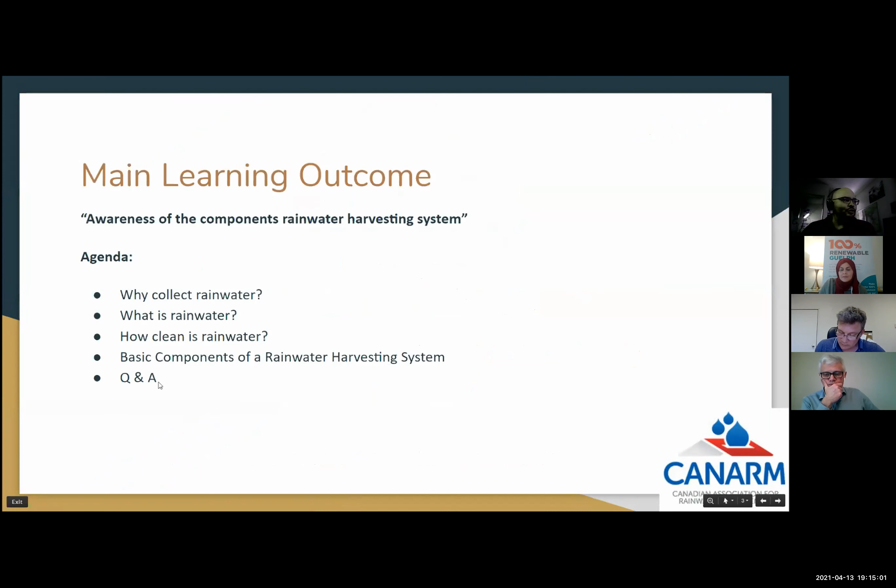So the main learning outcomes that I'm going to talk about right now are why collect rainwater, what is rainwater, how clean is rainwater, some of the basic components, and then I do have Q&A here, but this is a mistake. That's at the very end of everyone's presentation. The Canadian Association for Rainwater Management is a non-profit corporation. It was formed in 2012, and our mandate is to bring awareness, education, and conduct research in the best practices of rainwater and stormwater management.

So the first thing really to set the ground running is what is rainwater, what's stormwater, what's gray water, what's potable, what is all this water? So rainwater is fresh precipitation straight from the sky. It does not touch the ground. Once it has touched the ground, it is stormwater or becomes a different type of water. So rainwater has not touched the ground, it's right off the sky.

The next thing is stormwater. Stormwater is rainwater, but it's touched the ground. So typically it's unmanaged at the source, and it will have to be managed further down the flow path by stormwater management systems. And that's what's really causing infrastructure problems and environmental issues.

Gray water. So gray water is once-used household water discharged from washing machines, showers, tubs, and bathroom sinks that do not have fecal contamination. So essentially we take this water from these sinks and then we can reuse it for toilets or irrigation, very limited use and a very limited shelf life. Potable water is obviously drinking water safe for human consumption. Groundwater would be water that is underground.

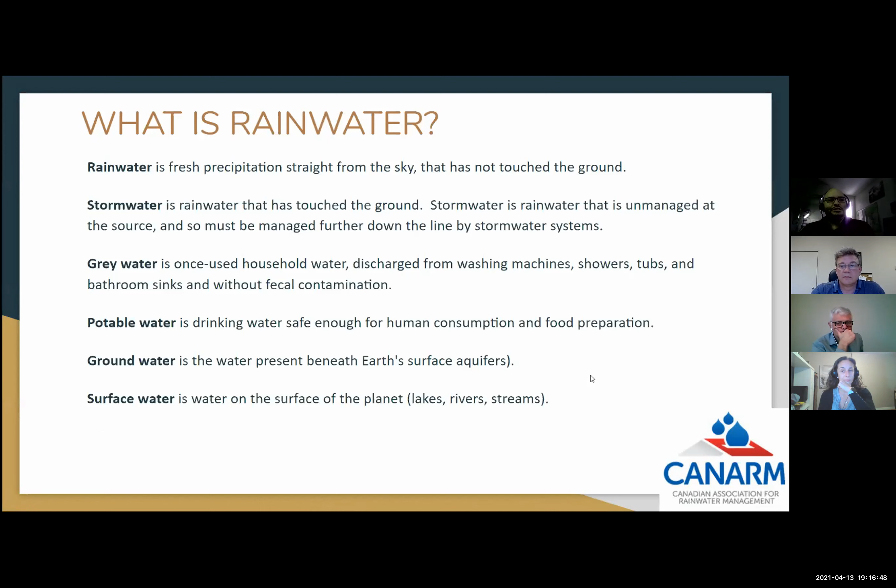So it's in your well, aquifers, it's underground water. And then you have surface water, which would be lakes, rivers, and streams. The one that's not on here would be non-potable water. And that would be the water that you could reuse in your house that we could classify as rainwater.

Why collect rainwater? So first off, rainwater is clean and very, very cost-effective to treat, as opposed to other source waters. Rainwater and stormwater are normally a wasted resource that is managed by the municipality or the environment gets hit with it. We have shortages of good water sources.

So we're getting to a place where homeowners are building a new home, they're going to drill a well, and they're coming up dry. Huge investments, $10,000, $20,000, $30,000, no water. So rainwater provides an alternative to actually potable water. Accessing an alternative water source versus your groundwater or surface water or municipal supply.

Now, you can save money on your water bills. So if you're in the city, this can reduce your water consumption bill. And if you're hauling water or on a drilled well, it can A, save you from drilling a well, and B, reduce hauling water costs. So it obviously has a positive environmental impact.

Stormwater that makes it to the environment typically has debris in it, it has toxins in it, and then those adversely affect the environment. It's becoming a very serious concern. So environmental government regulations will mandate having to do it or how best to go about harvesting rainwater.

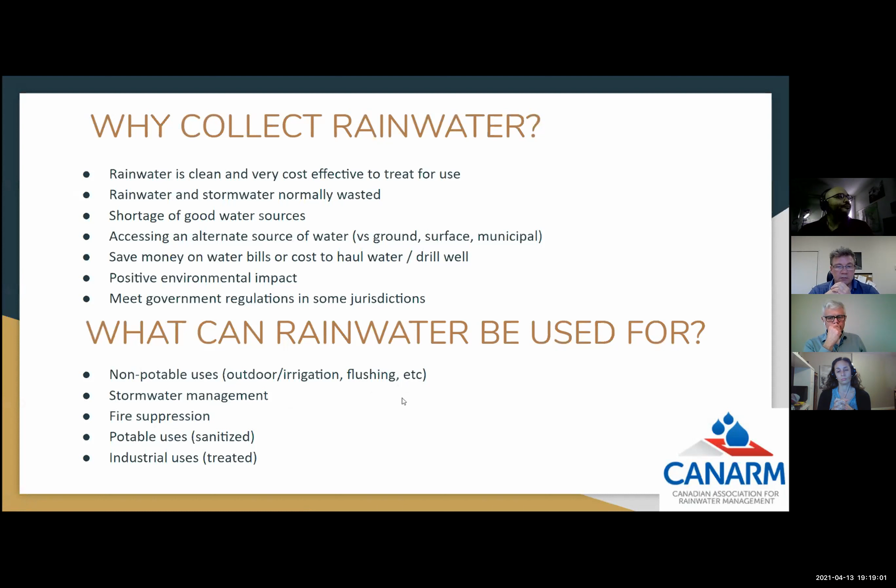So the basic components of a rain system. You need a catchment surface. Again, because we're talking rain, it is a roof. If it's not off a roof, if it's off a ground or a parking lot, it would be considered stormwater. We need a conveyance system. So a big advantage to rainwater is we can utilize the existing infrastructure in most buildings, which is your gutters and your downpipe. So that would be your conveyance system.

Now, all rainwater systems should have a pre-filtration device. Pre-filtration is going to remove the contaminants in the rain that both feed the bacteria and contain the bacteria. So by limiting that debris, we can really breathe some life into our rain tank. The rainwater storage tank definitely is the heart and soul of this type of system. And then in the rainwater tank, this one's showing a calming inlet and a skimming overflow to the drain.

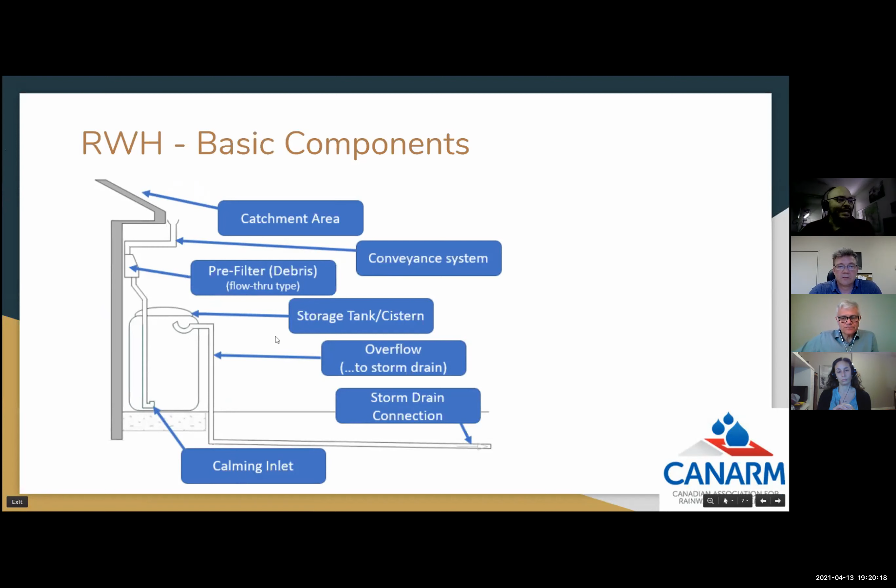Now, depending on the type of barrel and the size of system, if it's a small barrel or if it's getting into these larger scale seasonal systems, some of these components may not be needed. But again, this is a very basic overview of what a rain system would entail. And then you'd also have your pumping and treatment after.

So how clean is rainwater to begin with? So rainwater is non-potable off the roof. Therefore, it will require treatment to make it potable, to make it drinkable. By using pre-storage filters and post-storage filters, the water quality can be achieved. So you can get this water to all sorts of levels for all sorts of price points. And it all comes down to your pre-filtration and your post-filtration, which are really the two big concerns with getting your water to that quality.

The more time and energy that's put into pre-filtration, the less load we're putting on our treatment system. So I look at that as a proactive, preventative approach to water treatment. Typical water treatment sources, you're going into a lake or a well, and you're removing contamination that has got into the lake or the river or the well.

With rainwater, we have an advantage here. We can proactively eliminate that contamination with pre-filtration, first flush diversion, before it gets into the tank. Then we're putting a lot less load on our treatment system. And then treatment can be minimal cost. You can have potable water.

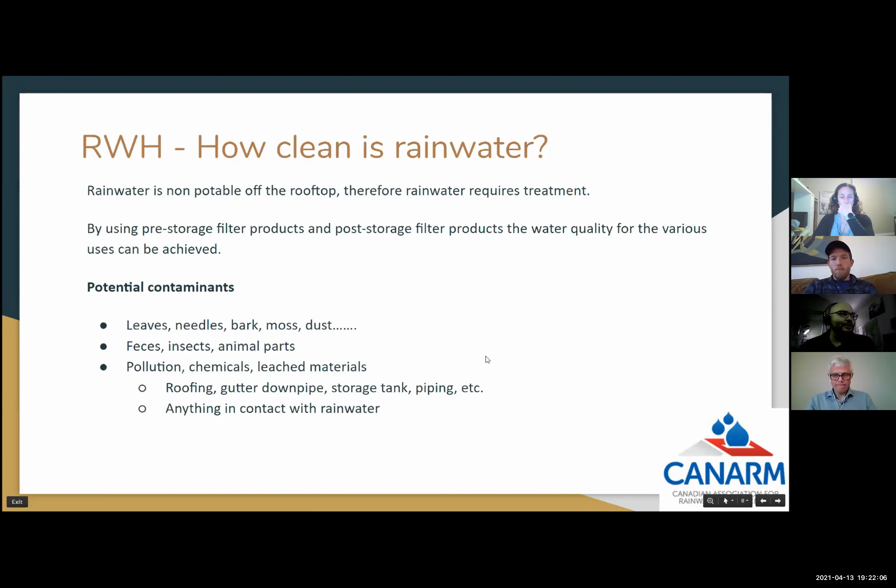So the main contaminations would be leaves, needles, bark, moss, and then obviously the ones that maybe people don't really think about would be other chemicals and pollutions and leaching materials that may come off your roofing and piping. So when you're getting into using rainwater for more potable purposes or in the house, you want to really look at everything that's touching the rain from the roof to the tap and dive into if that product is suitable.

Now, rainwater harvesting off a rooftop. Rooftops are the clean surface. They have way less pollution than ground level. So just naturally, because of the raised elevation, you're not getting the dust and debris that you would get on the ground. Not to say there's none, but it's less.

So gutters and eavestroughs are what's going to provide the appropriate design for your conveyance system. And because these catchment systems, these roofs, these gutters, these downpipes are already readily available, a huge aspect of your rainwater harvesting system is already part of the property or already part of your new build.

So on the far left, we see an asphalt roof. It's your most common. Now, it wouldn't be advised to drink off of this roof, but it is used for everything else. Over here, we've got clay tile with, I believe it's the Tesla shingle, but I'm not sure. And this would be a suitable surface to drink off of.

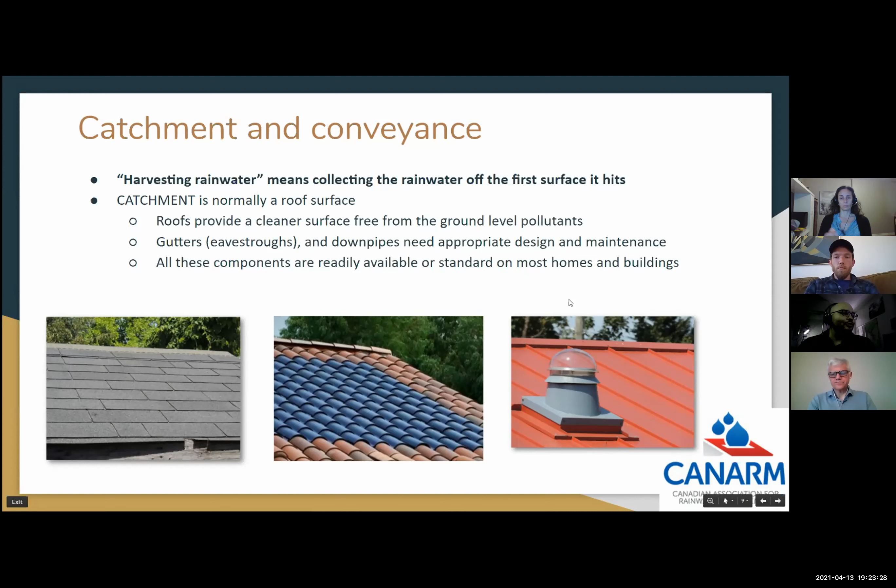And then you have a metal roof. Now, metal, depending on the type of metal and the type of paint, metal roofing can be a suitable surface, but again, you should dive into the type of roofing if you are going to drink off of it.

So why pre-filter the rainwater? Pre-filtering, I kind of dived into this, but it's going to remove the solid particles that contain nutrients and bacteria. Depending on the pre-filter, you can aerate and oxygenate the water.

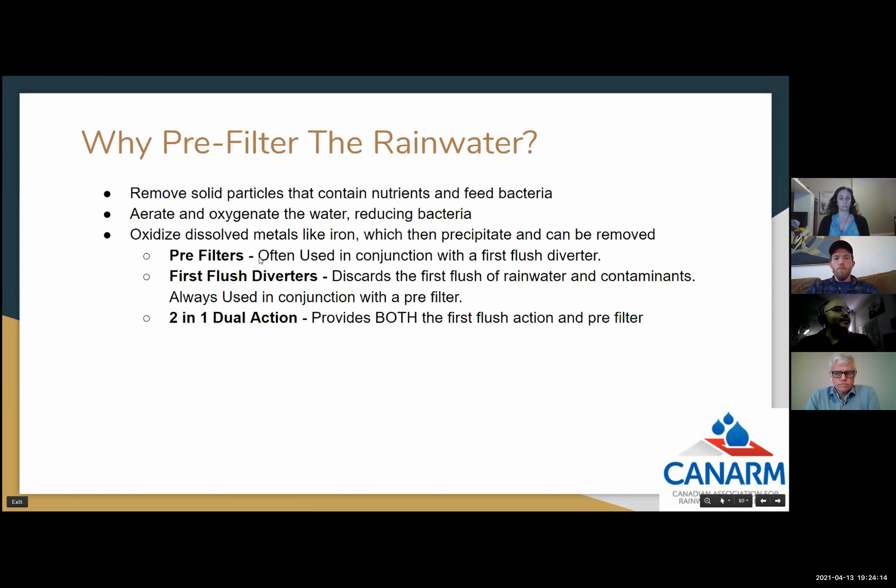It can dissolve metals in the rainwater like iron, because oxidization will occur and because you can get aerobic and anaerobic breakdown in a tank. You can actually start to take things out of the rainwater naturally through the health of the rainwater system. So there's pre-filters, there's first flush diverters, and there's dual action systems.

How am I doing for time here? I think I'm doing okay.

Yeah, okay. So storage tank. It's the heart of the rainwater system, really, is that storage tank. These are some of the components that may be in it: calming inlet, skimming overflow, floating intake for a pump. Now, when it gets into all the pros and cons of products, everything has pros and cons. Every product line has its benefits and its weaknesses. There really is not one that's necessarily superior to the other.

Above ground tanks are the most cost effective option by far for rainwater harvesting, but they may require protection from frost. So you're going to put that inside a building, or you're going to drain it in the winter in order to use that all year, or in order to winterize.

Now, below ground tanks can be frost protected without putting them inside a heated building. You just bury them deep enough, so it's taking up less space, but you are going to require excavation and proper installation. They become a more costly installation method than above ground.

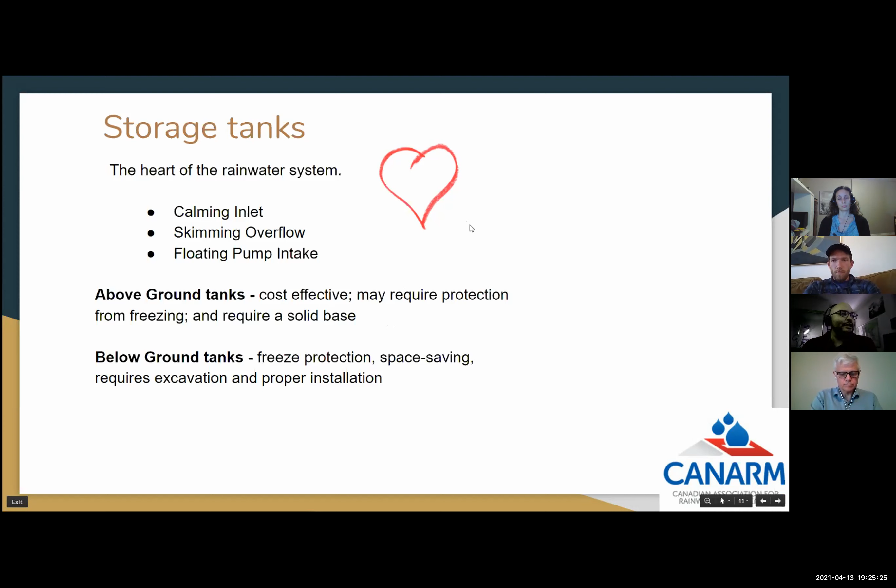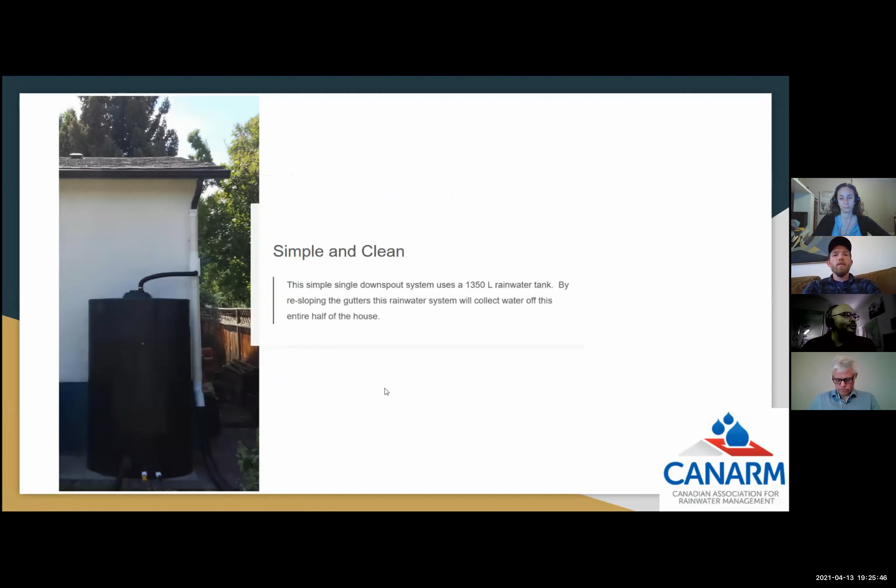So here's a very simple rain barrel. You've got a diverter on a downspout, and it's running into a tank. Now, by resloping the gutters on this type of house, you're able to get all the water to one side. And this simple barrel can collect water from half a house, if not more. It's a very simple and clean way to do rain harvesting.

Pressurized distribution systems. So after you've collected the water in a tank or a barrel, then you want to pump it. There's really three main types of pumps. And within those, there's parent categories. The parent categories are inline pumps that are positioned outside a tank, and then submersible pumps, which are positioned inside a tank, usually on the bottom of the tank floor.

Now, in those two categories, there's a manual pump, which will turn on and off when the power is applied. You can turn it into an automatic pump by adding a pressure tank and a pressure switch, which is a typical well jet pump system, very loud and kind of old school. Then you've got an on-demand pump, which will turn on and off when water is needed. It's got a built-in pressure tank and pressure switch.

It's a very great option, especially entry level, to get an on-demand water system without getting into much plumbing or electrical work at all.

The final level of these pumps would be a VFD powered pump, which is the most energy efficient type. They turn on and off automatically, but adjust the pressure by changing the frequency of the electricity in the motor, making them the most advanced option for pumps.

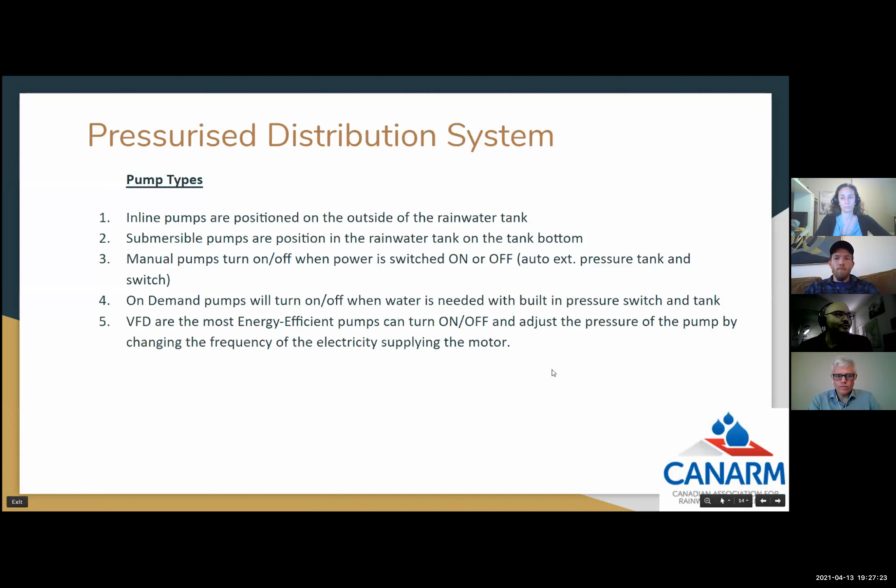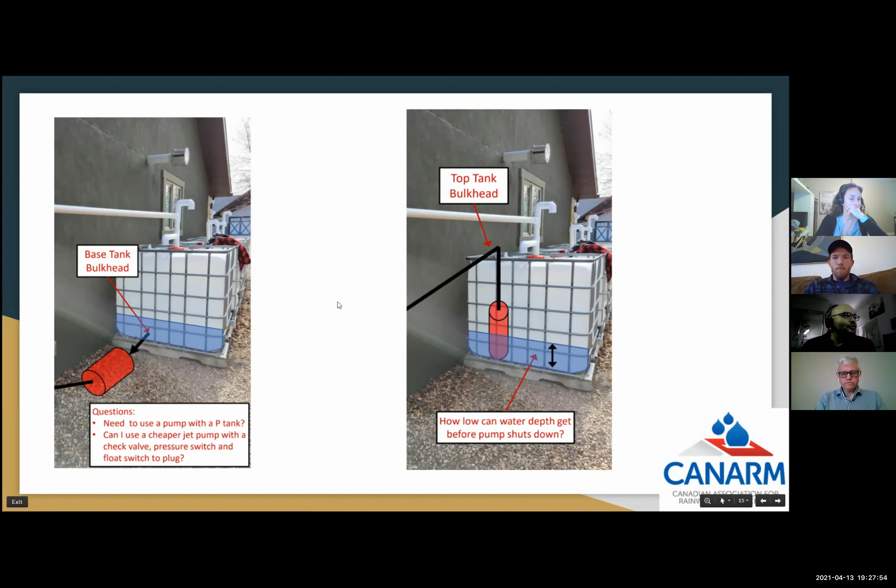Should I treat rainwater? Rainwater is relatively pure and clean, but the roof can introduce some contamination, so depending on what you're going to use it for, there are different types of filtration.

If you're going to irrigate with it, you probably want a basic sediment filter to protect your irrigation equipment and possibly your pump, maybe a carbon filter too. If you're getting into toilets and laundry, typically for code, you'll need particle filtration.

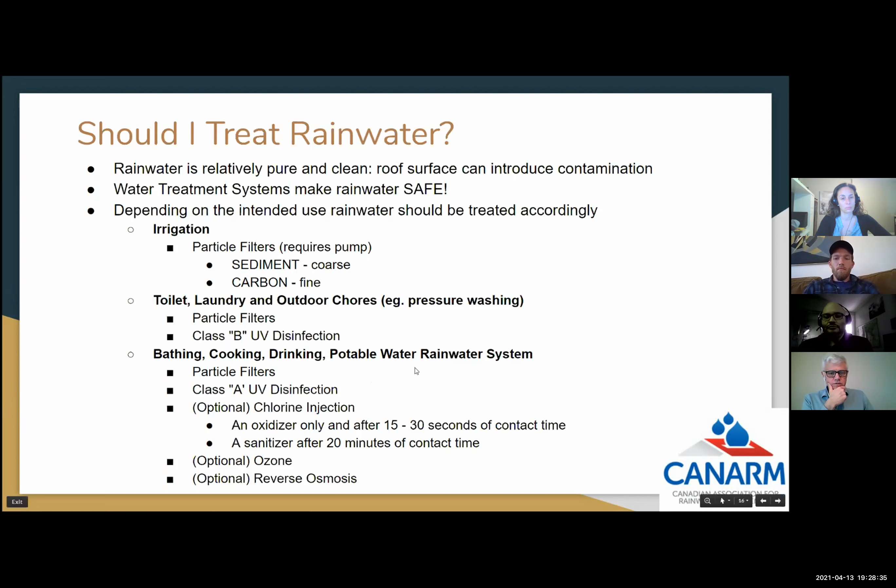To be honest, that's getting into the more advanced system. That's my last slide right there.

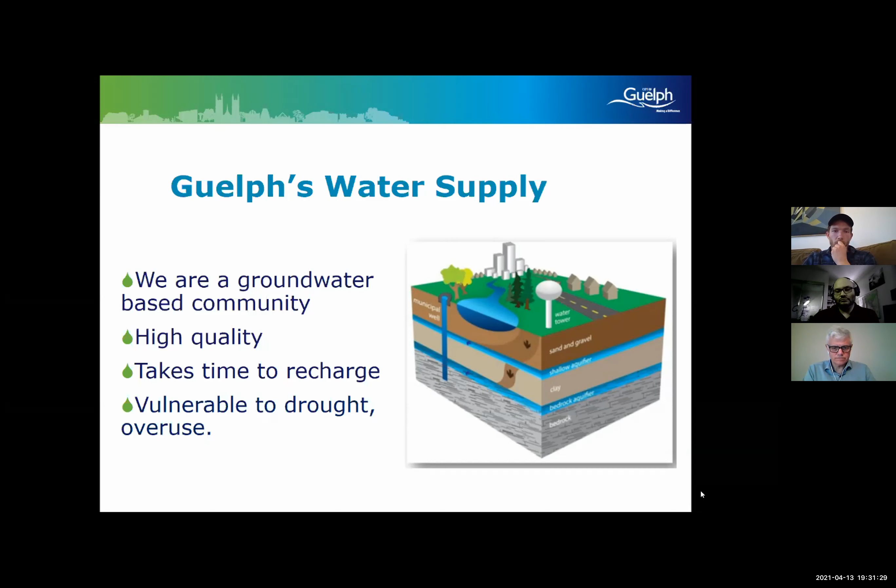That's why we have to be careful, and we need to understand what we're doing to take care of that water, and how we can encourage more water conservation and lower consumption.

So in order to do that, there's a water supply master plan that helps us understand how to reduce that amount of water, because even after a lot of research and going through how we can meet our targets,

we realized that water conservation and efficiency is still the priority to reduce the demand we're going to have while the city continues to grow.

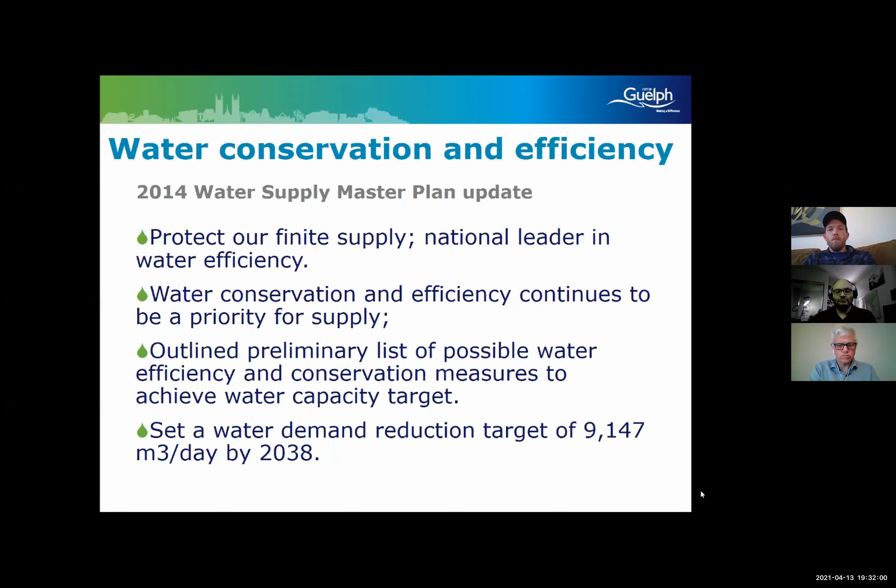So our programs have to focus on that.

After doing some community consultations and getting feedback from the community, we realized our priorities were very similar to what the community wanted to see. That's what led us to come up with a Water Efficiency Strategy, which is to reduce water use and help develop or implement new water saving technologies, so that even though the city keeps growing, our water demand does not.

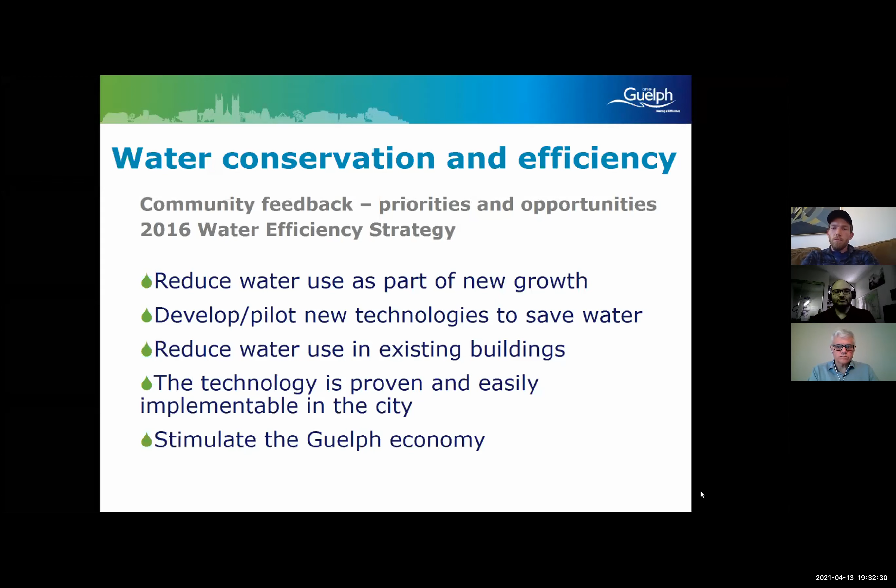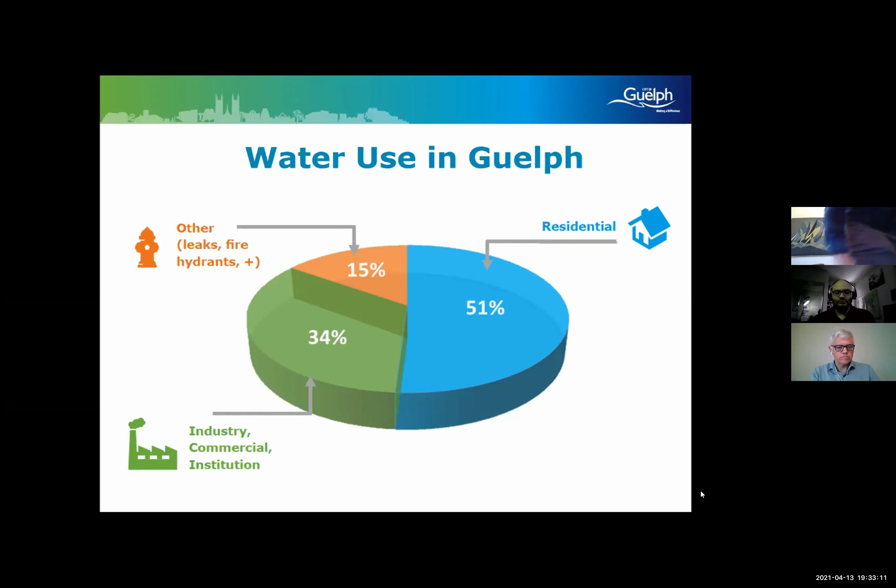Now, what can we do as users in Guelph? Our actions can actually highly impact water demand and our resources, because 51% of the water use in Guelph is residential. So even though industries and larger users have an impact as well, most of it actually comes from homes. And as we know, conservation is very cost efficient. If we conserve water, we can save resources that would otherwise have to be used to create infrastructure to cover the demand we'd have if we don't do these conservation or water efficiency programs.

Now, here's the average water use per person. According to Statistics Canada, Canadians use twice as much water per person compared to other industrialized countries. Usually the only country that uses more water than us per person is the United States. In Guelph, we are below not only the Canadian average, but the Ontario average. Right now, in 2019, which is the last data we have, we were at 164 liters per person. But our goal, in order to keep that expenditure on infrastructure away, is 150 liters per person by 2038.

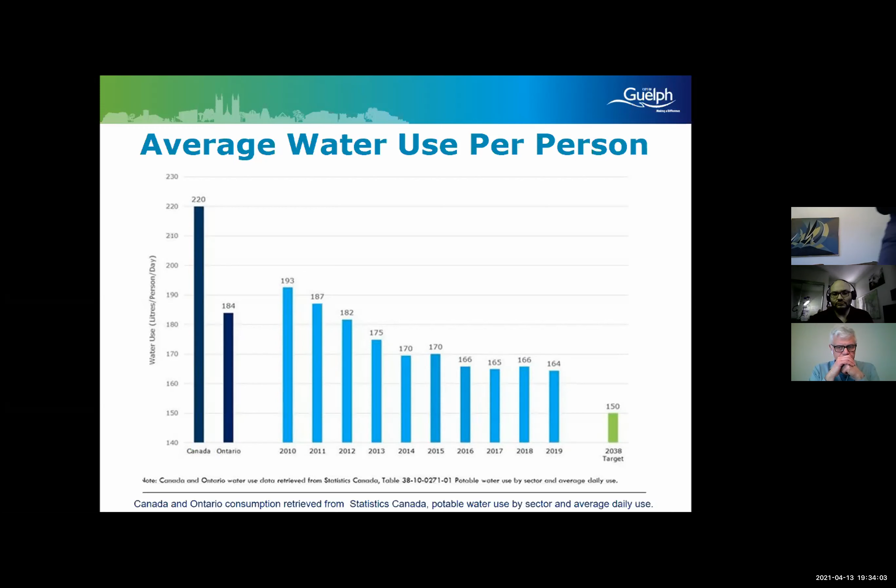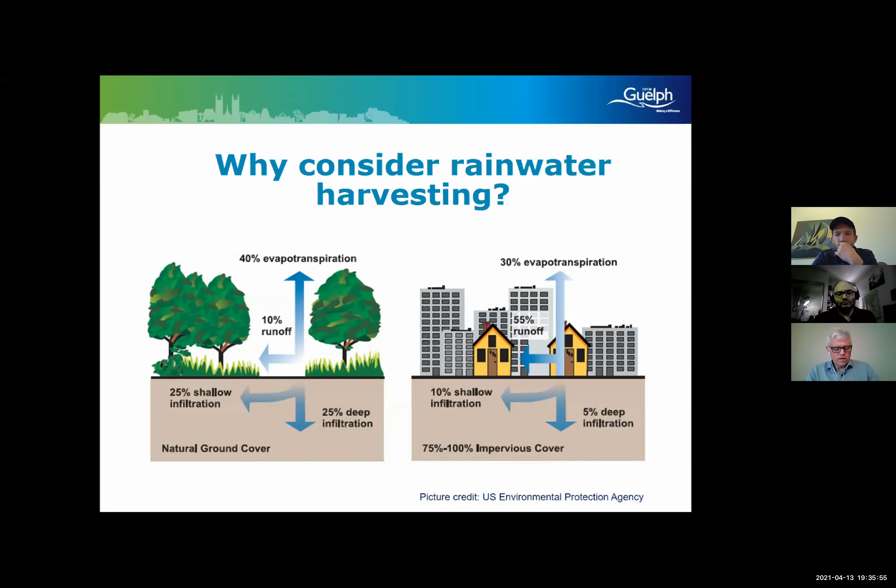The other reason we want to encourage rainwater harvesting, which Ben touched on a little, is because of the water cycle and how we have impacted it. Before, most of the water was infiltrated, some of it left through evapotranspiration. But as we started building our cities and increasing the amount of impermeable surfaces, that has changed. The water cycle has changed. Now we have way more runoff, way more stormwater. The idea is to try to reduce that, because with that runoff we are taking a lot of pollutants into our rivers and lakes. In Guelph, stormwater does not get treated before it reaches our waterways, so it's important to keep as much in place where it falls, or capture it in one way or another. That's the other part of our programs, like source protection as well.

I think Ben touched on this a bit, so I'm not going to talk too much about that.

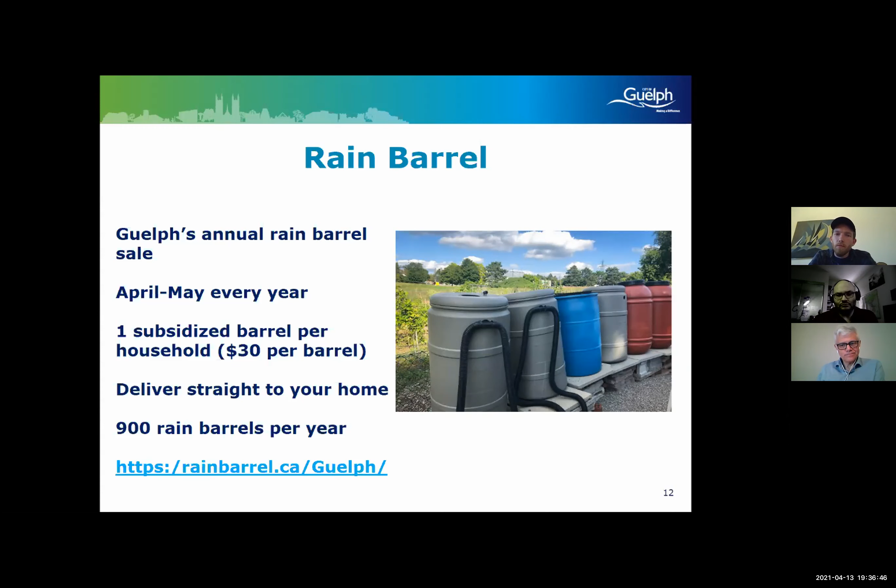Based on all that, we developed some programs that can help homeowners and property owners reach these goals while also reducing their bills. One of them, the easiest one, is our Rain Barrel annual sale, which is happening right now. You can purchase one subsidized rain barrel per household. The website is over there. We usually sell about 900 rain barrels per year. You can get more than one, but you have to pay full price. This year, due to COVID, you actually get the rain barrel delivered straight to your home, which I think is an advantage.

Then, going from the simplest systems to the more complicated ones, we have the seasonal rainwater harvesting rebate. In this case, you can get up to $2,000 depending on the amount of liters or the capacity of the tank you are using. This water is usually used outdoors, only during the summer months. It does not have the capacity to stay active during the whole year because of our freezing temperatures.

And the tank has to be at least 500 liters in order to be approved for the system. If you have any questions, I'm putting on each slide the website where you can find more information, or the email of the person in charge of that specific rebate.

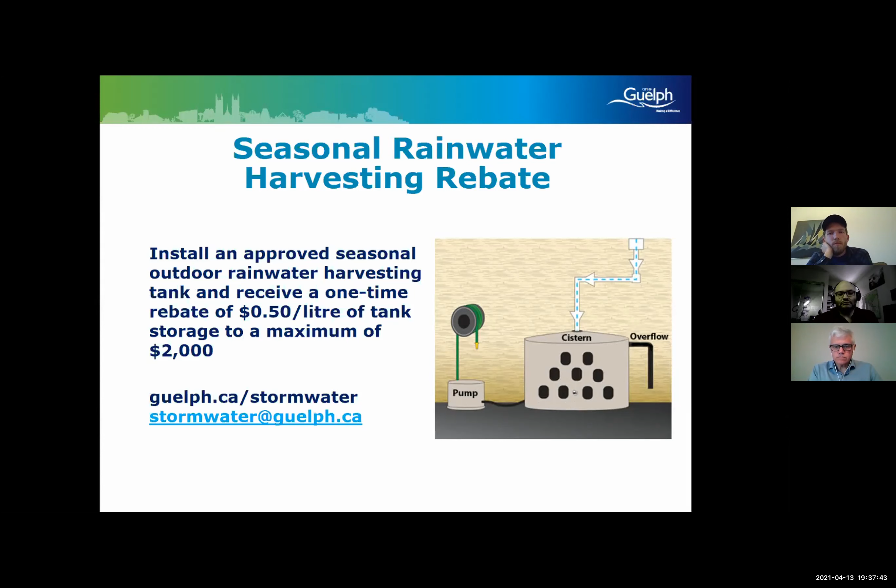Then we have the more complex all-season rainwater harvesting systems. For those, you can get the $2,000 rebate as well. These systems can work all year round. The water is treated before and after the storage tank, so it can be used in washrooms, urinals, and for irrigation if wanted or needed.

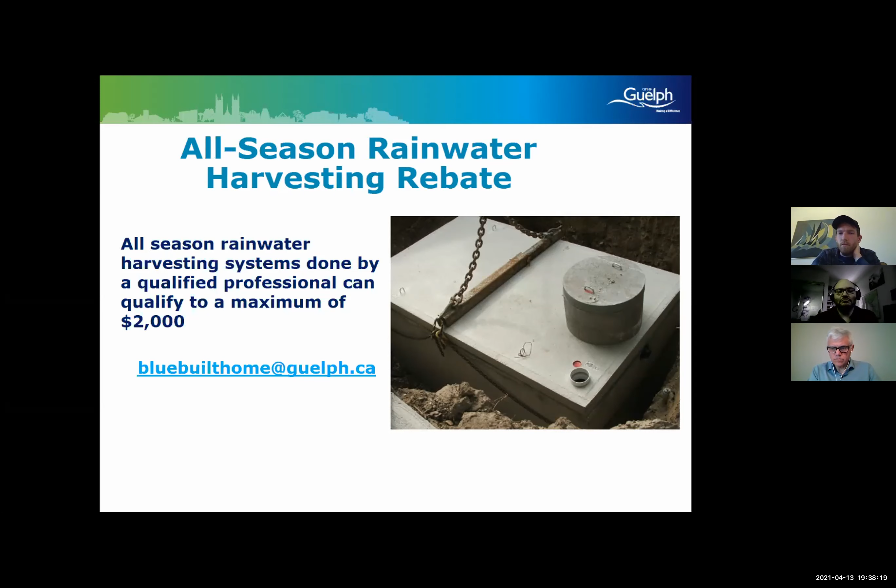Then we have other programs that combine our outdoor use programs with rain harvesting. We have a rain garden rebate, where you can get up to $2,000. This depends on the amount of liters captured by your system and the cost incurred to build the rain garden. You can also get a free rain garden visit to get advice on design, materials, and size, to make sure you are doing it properly. The contact information is over there.

So as I said, we have a lot of programs that will help you, a lot of rebates that can help incentivize water conservation. All these programs are summarized in our Blue Built Home program. So if you want to learn about all the different rebates, you can go to our Blue Built Home and see all of them together.

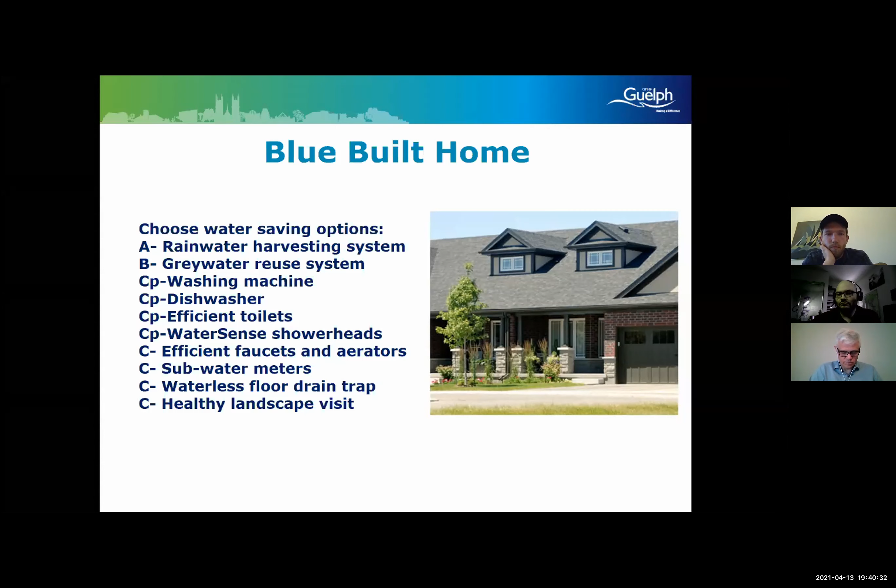You can actually reduce more than 50% of the water use of your home if you sign up for a lot of these Blue Built Home saving options. If you apply for the Blue Built Home, you have the opportunity to receive up to $2,465 in rebates.

And if you're a little bit lost and don't know where to start or how to move a step forward, we have a partnership with Emerge where they do home tune-ups. They do home visits to help you understand your water and electricity bills, help you save energy, save water, save money, and they are very familiar with all our rebates, so they can help provide that information as well. I totally encourage you to register for that.

And that's it, that's my contact information. And I think with that, I am going to stop sharing.

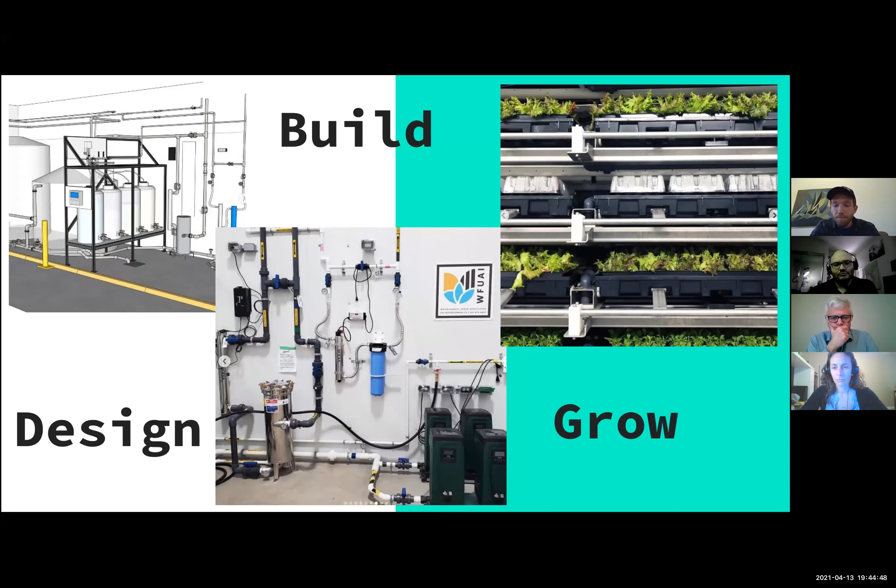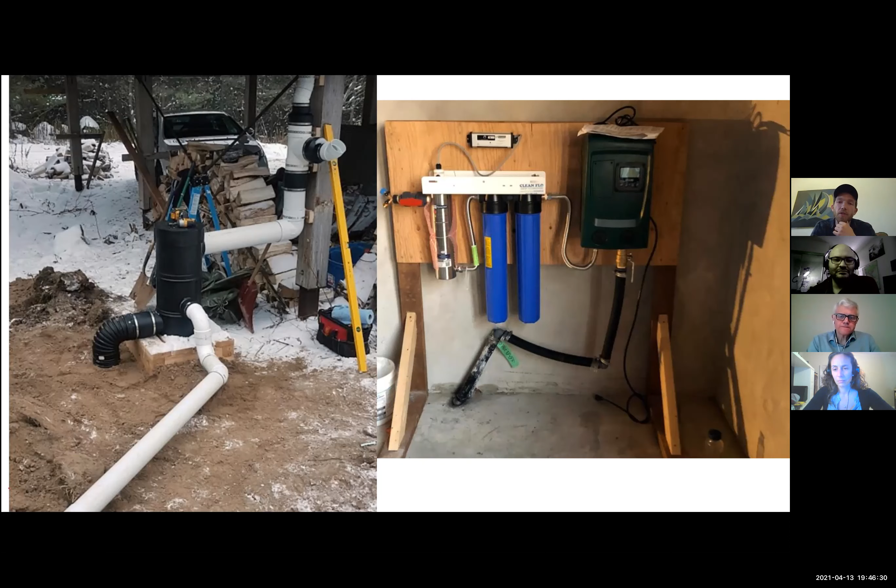Just as an installer working in this field, we only do about 10% of our business in rainwater, but I thought I'd share some considerations for the wider audience. Happy to take questions later, but I think some of the main challenges are the scale of catchment and sizing an appropriate system, assuming we have to get larger.

Evan, if you want me to cut it off soon, let me know. Yes, please, that'd be great. Yeah, so just leave this here for a second. I know everyone's getting the presentation.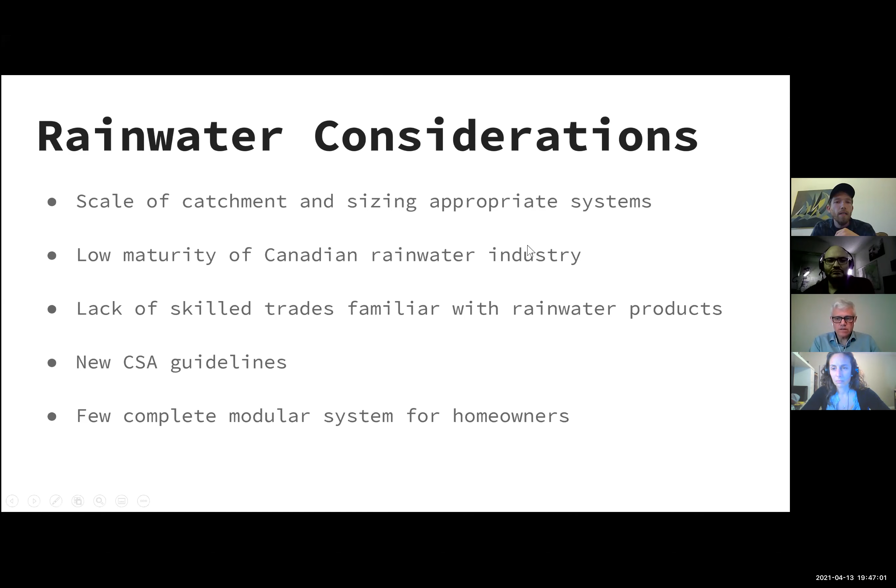So the main thing we've now developed is this concept of RainWaterOne, which is basically an entry-level homeowner appliance that's not like a large-scale below-grade system, but is also approved for the city's rebates. It's sort of the one step up from a rain barrel system.

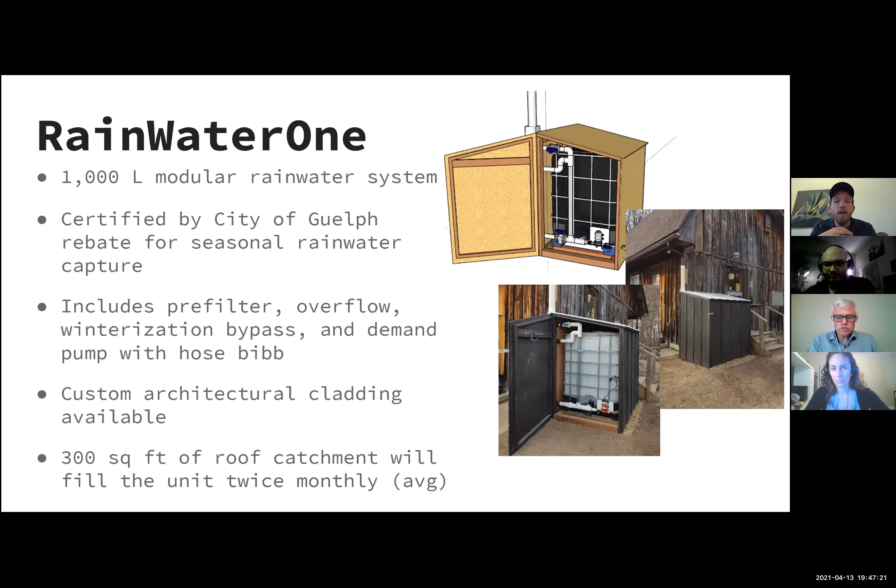Thanks. Great, thanks, Evan. I don't have the opportunity to use my name when I'm talking to someone else very frequently. I really appreciate that.

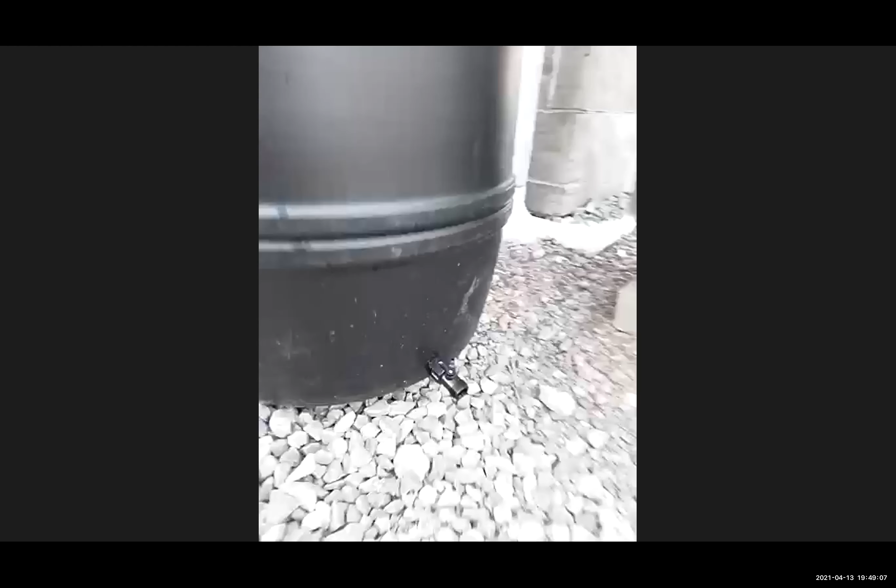Sure, so I was going to show you some of the toys I have here today. Hopefully you can see that there. That is a repurposed rain barrel that came into the country with olives, pickles, cherries, things like that in it. We convert those into rain barrels by drilling a hole on the top and adding a leaf and mosquito filter basket, by adding a spigot down at the bottom that you can connect the garden hose to, and by adding an overflow outlet. However, that should have an overflow hose on, but I forgot to bring one home.

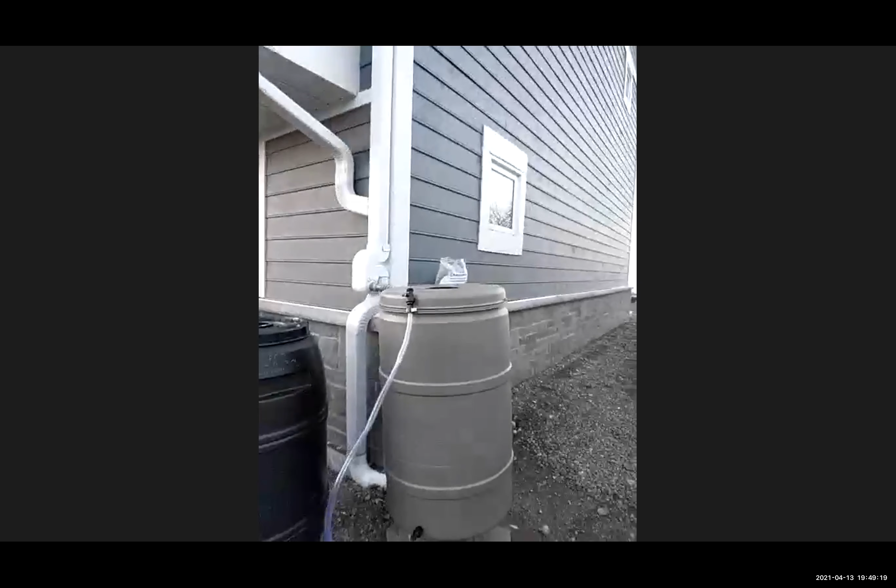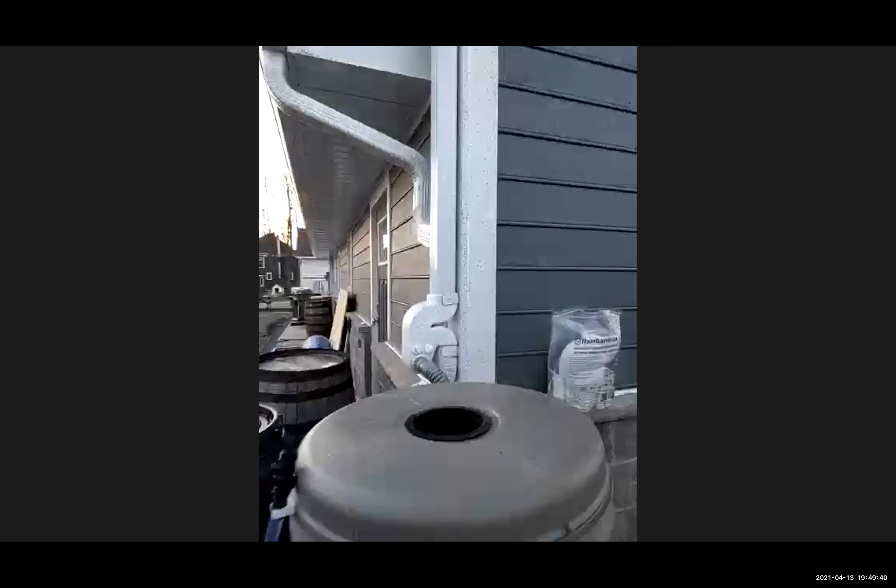The City of Guelph is selling this barrel right here. This is a Sandstone Barrel, and they are the only city that I know of that has a wide-ranging subsidy program. That barrel typically sells for about $85, and you can pick it up at the City of Guelph through our website for $30. Behind it, I have a downspout diverter, and I'd like to talk to you about that a little bit later, but I only have 2 minutes here, so just showing you how that downspout diverter connects up to the rain barrel.

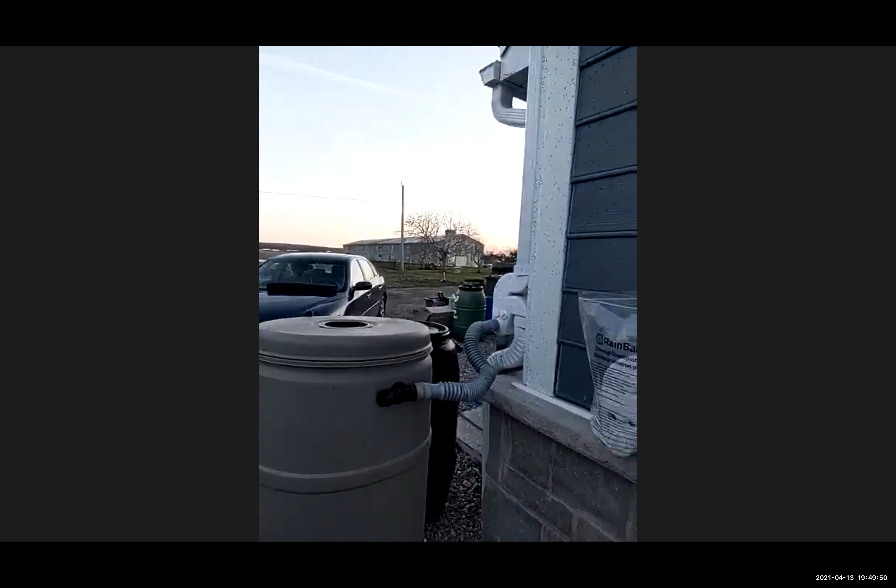Are these images coming through? I'll take that as a yes. Very good, yes they are. But most importantly, let's follow this downspout down and let's see what's happening here.

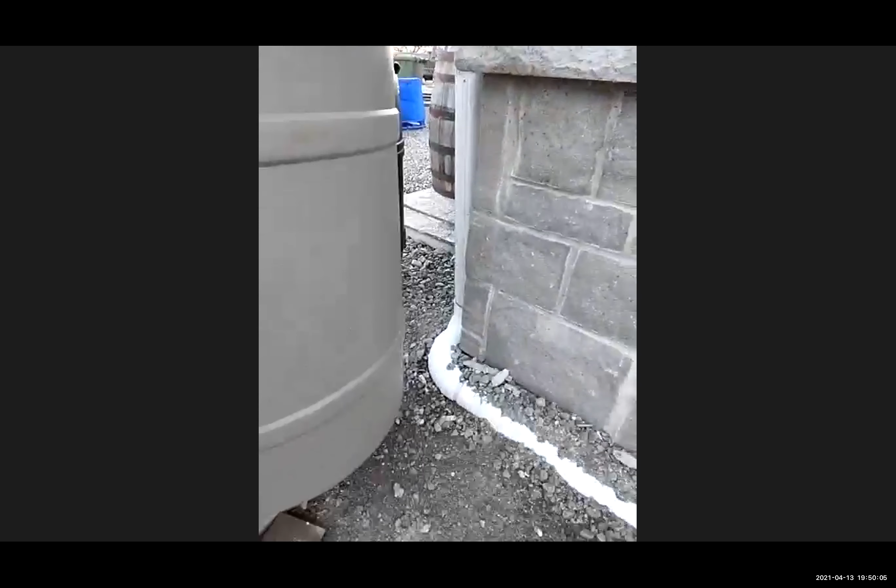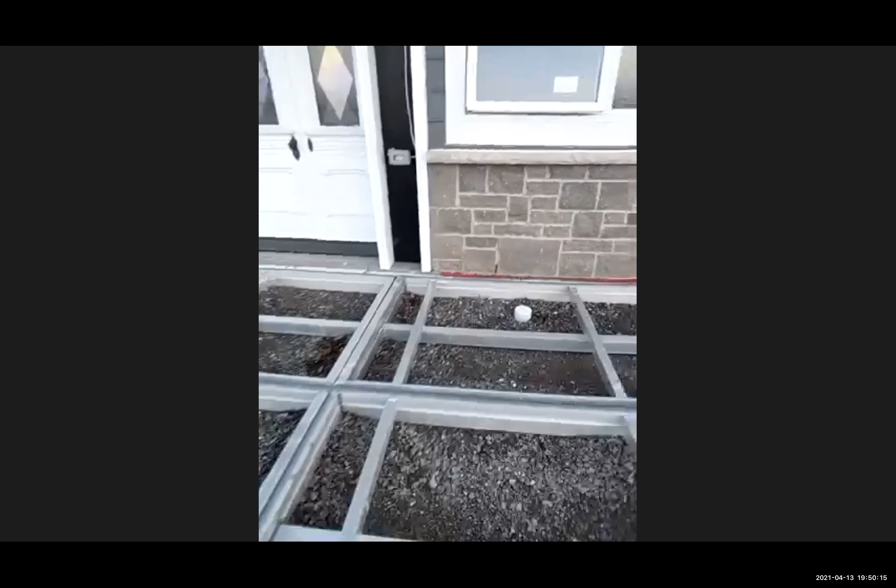Our downspouts are running into a pipe that runs along the house here, and it runs to the front of the house where we have a clean out right there. That clean out runs from the house to a cistern here that captures rainwater. That cistern over there is our trucked-in water, and this cistern here is our rainwater.

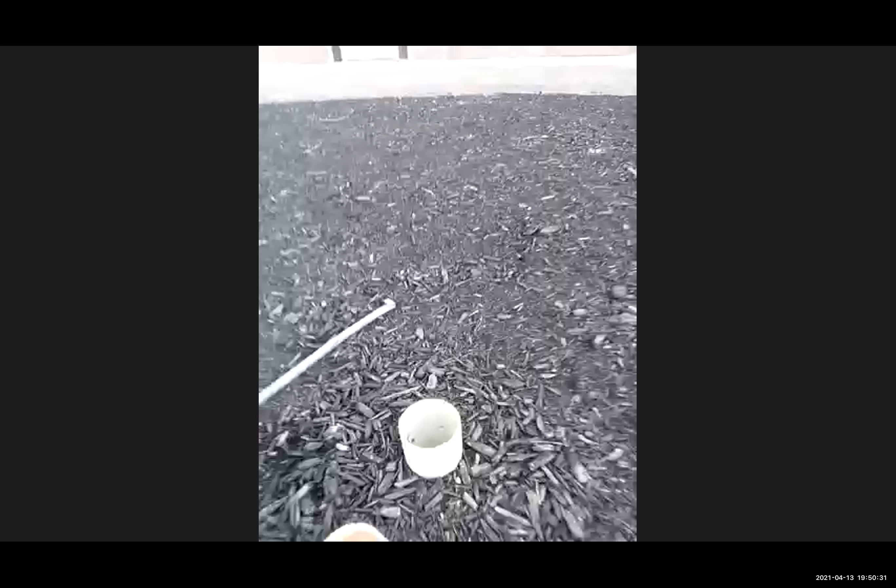And here's where we MacGyvered a filter. I have not cleaned this filter yet this year, so no idea what's going to come out of this. Maybe not even the filter. That does not want to come out. Come on, filter. Anyways, it hasn't been cleaned yet.

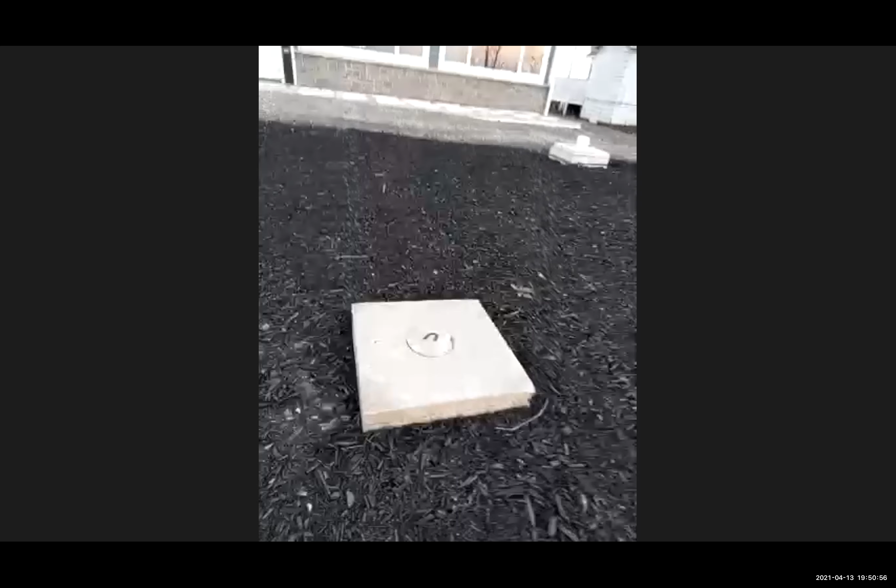And when this cistern fills up, the pipe then runs through the ground and over here, because whether you have a rain barrel or even a much larger system, you still have to deal with this.

I think we might have lost you, Larry. Can you hear us? Ben Morrison, are you going to be ready shortly? We may have to switch to you quickly here. Oh, there you are, you're back. Are you, Larry? I am here, yeah. Yeah, go ahead, you froze there for a little bit.

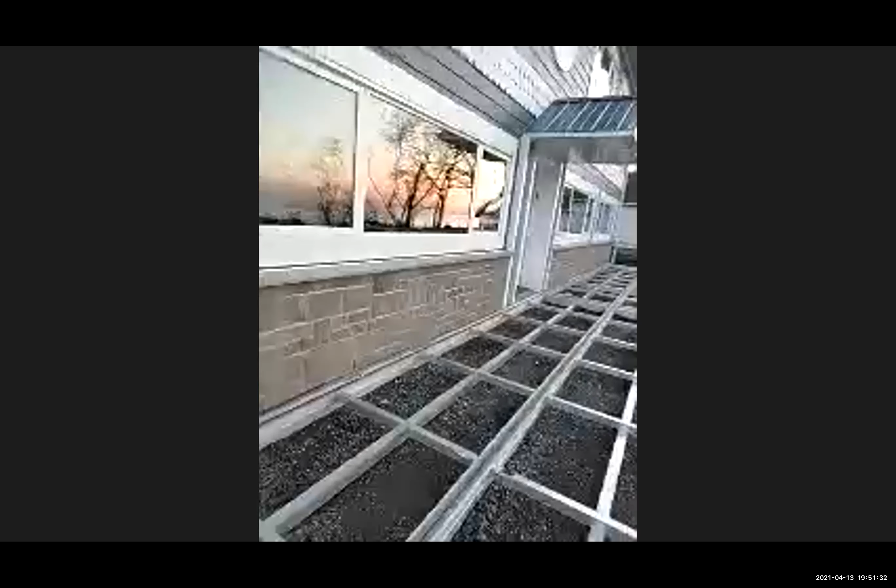So I don't know how far we got, but I was basically showing you that we're walking the talk. We have rainwater collection into a 2,000-gallon cistern here, and we flush our toilets and use all of our outdoor water as rainwater through the taps.

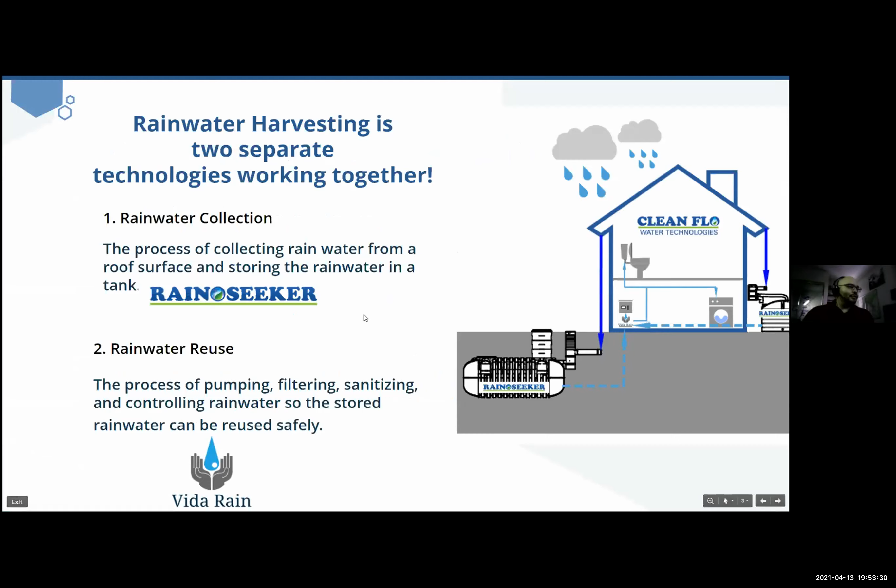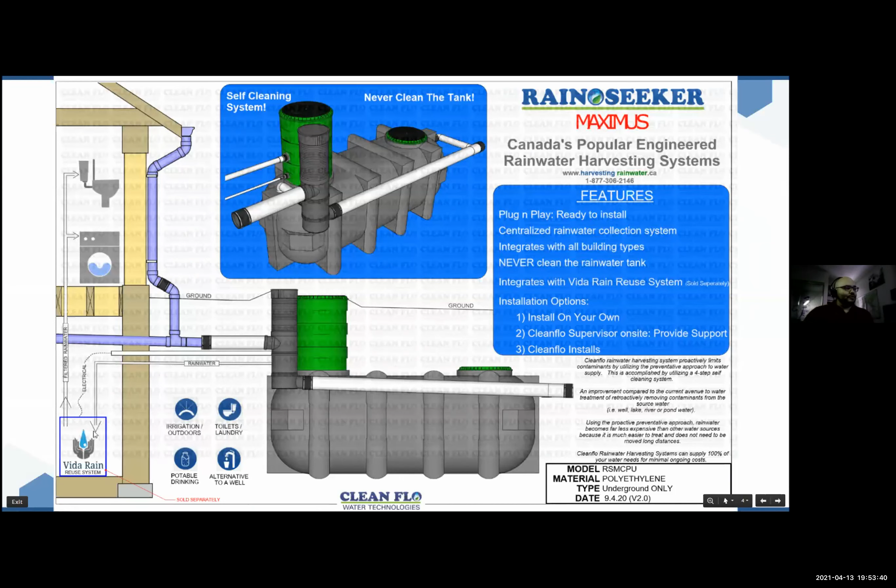Typically what we look at is two systems working together to get your rainwater system functioning in the house. A Rainseeker system, which collects water, and a Vida Rain reuse system, which will pump, treat, and sanitize the water to meet code. This would be one of our spec sheets for a below ground type system. You've got the water coming off the roof, going to a pre-filter, then into a tank, and then back into the house into a Vida Rain system for reuse in the house.

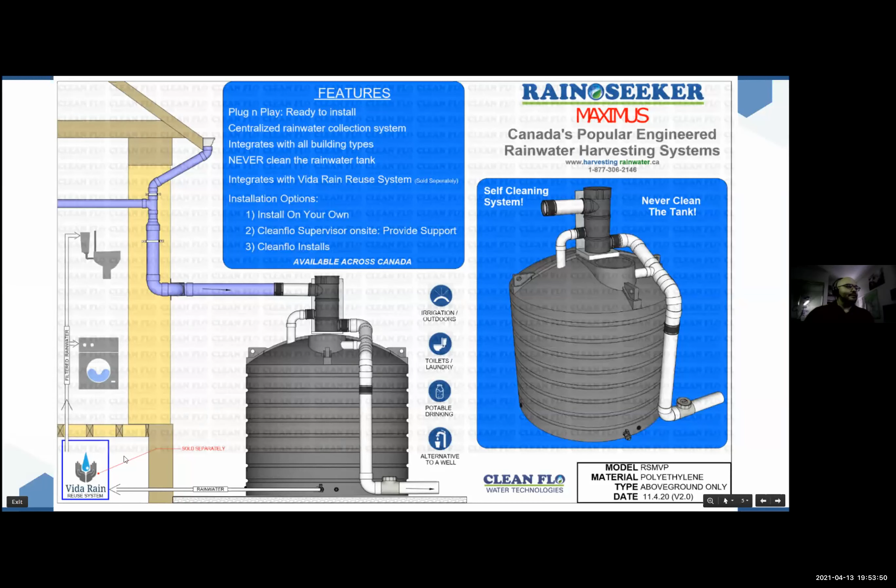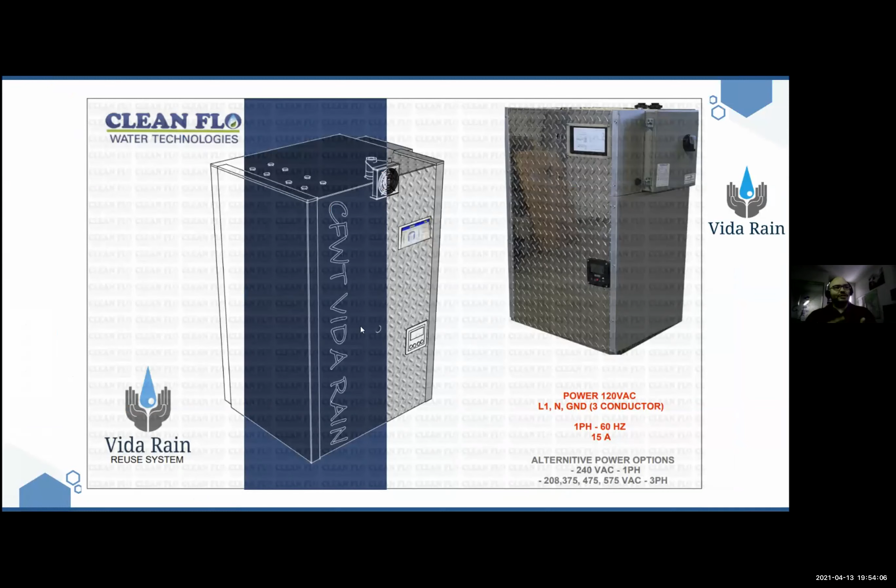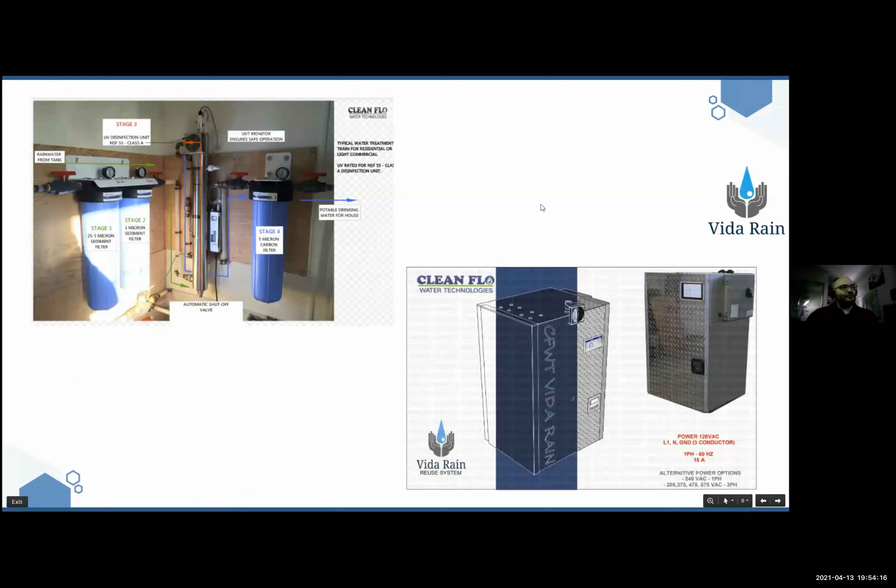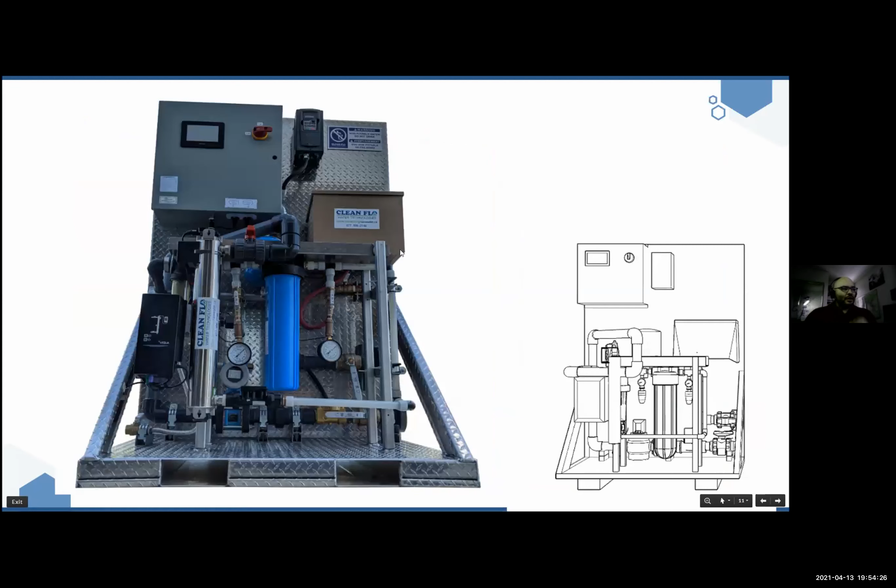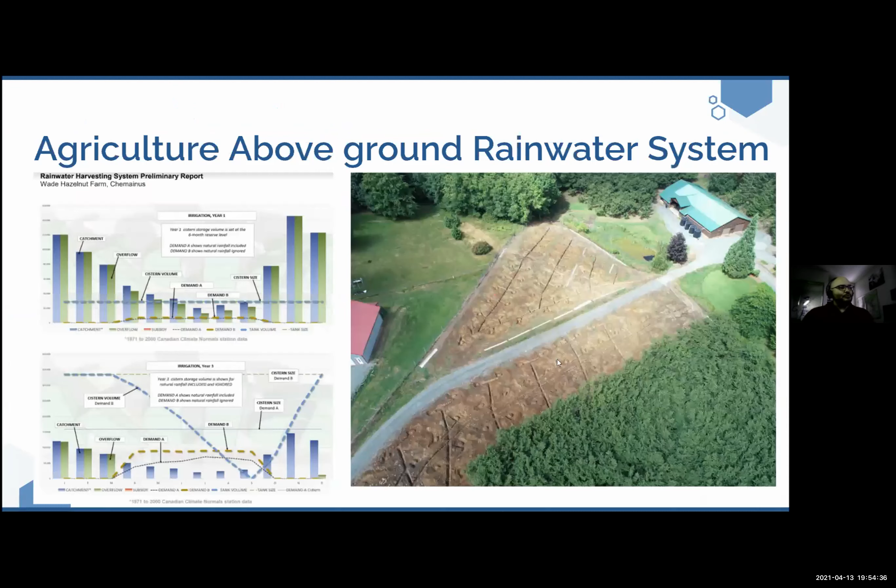So typically you'd have something that may look like this. This is kind of what it converts into, all in a nice package. There, it's all ready to ship. And then here's larger commercial systems that we're a part of for large scale. Here's, excuse me, for the RCMP in Ottawa, a commercial skid that we built, larger scale underground work, above ground for a farm, for hazelnut production, so a large scale irrigation system. And then IKEA is another large one we've done.

So yeah, that's a real quick 2-minute splash of what we do. I didn't want to take up too much time. I could talk all day, but I'll leave it at that.

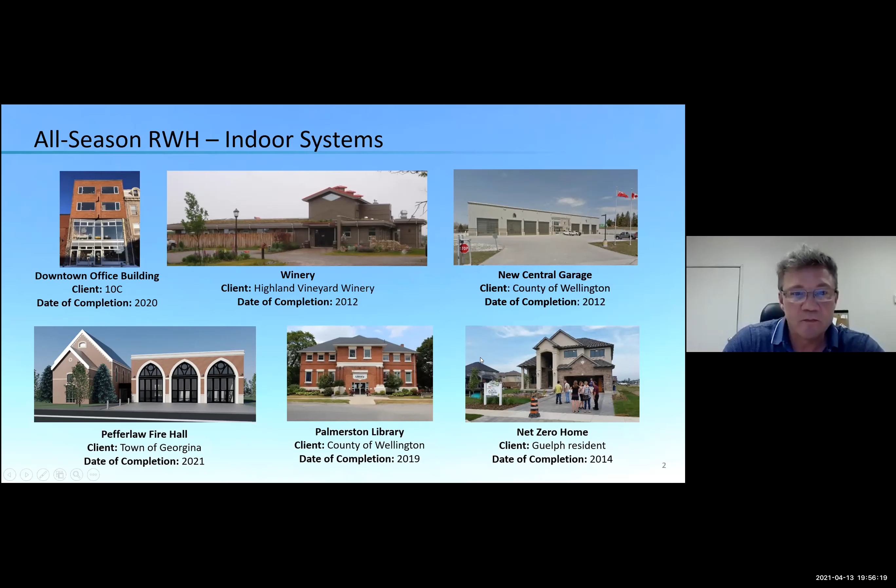All-season rainwater harvesting may be used for a number of applications. This slide I brought up describes a variety of projects that we've worked on, and they include office buildings. A number of viewers will recognize the 10C building in Guelph, vineyards, municipal garages, fire stations, libraries, and residential applications. Keeping the audience in mind, I thought I'd focus on a few local residential projects that some would recognize.

This screen shows Guelph Campus Co-op at 7 College Ave, across the street from the University of Guelph Vet College. For 14 years, it has been utilizing rainwater and snowmelt for toilet and urinal flushing and laundry use. And our calculations determined that 6,000 liters of water storage would be optimum for this facility. And we have it in the form of these 4 tanks located in the basement.

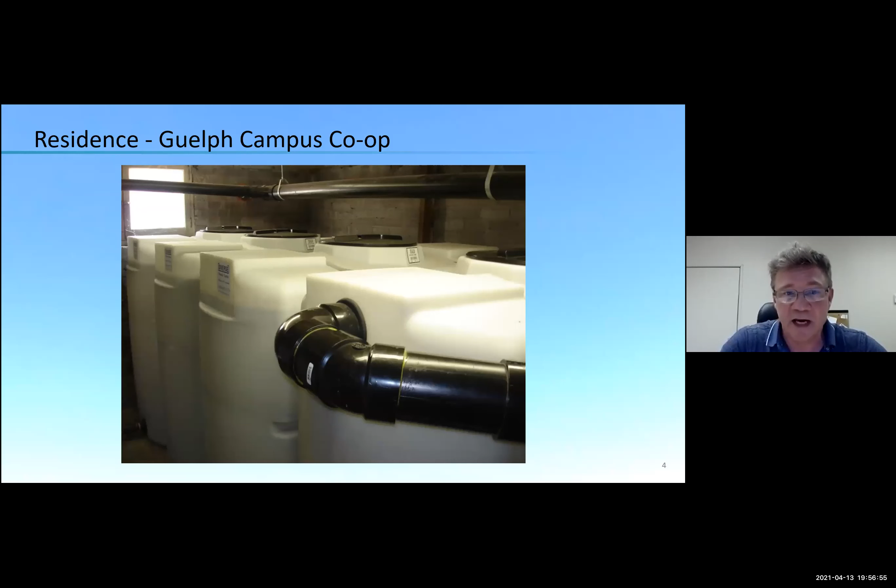Another residence in Guelph at 64 Albert Street, located near Royal City Park, is an example of indoor water storage. This is a 3,400 liter tank located in a crawl space in the house. And it provides rainwater and snowmelt that's been treated for toilet flushing, laundry, and exterior hose bib use.

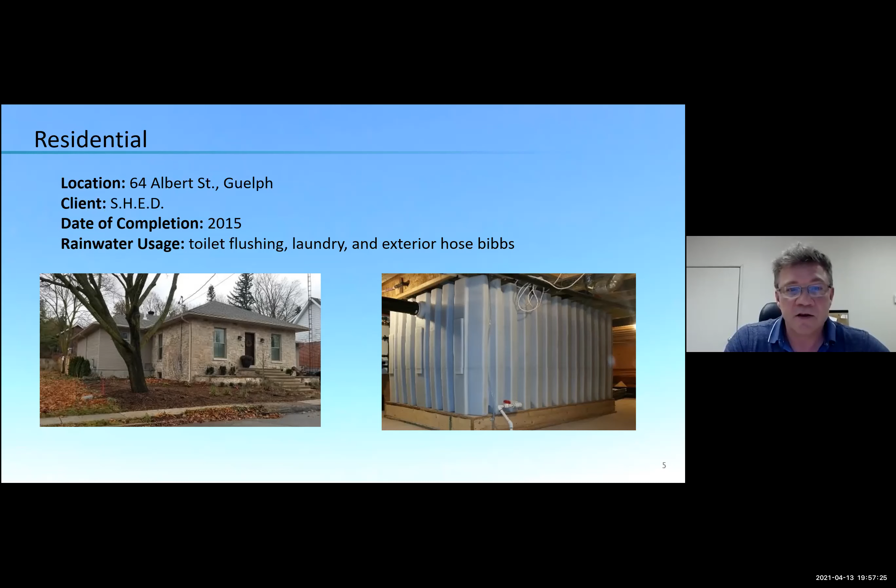And another example of a residential application with underground outdoor water storage, with a tank in the bottom right-hand picture there. And this facility uses the rainwater for toilet flushing, exterior hose bibs, and irrigation.

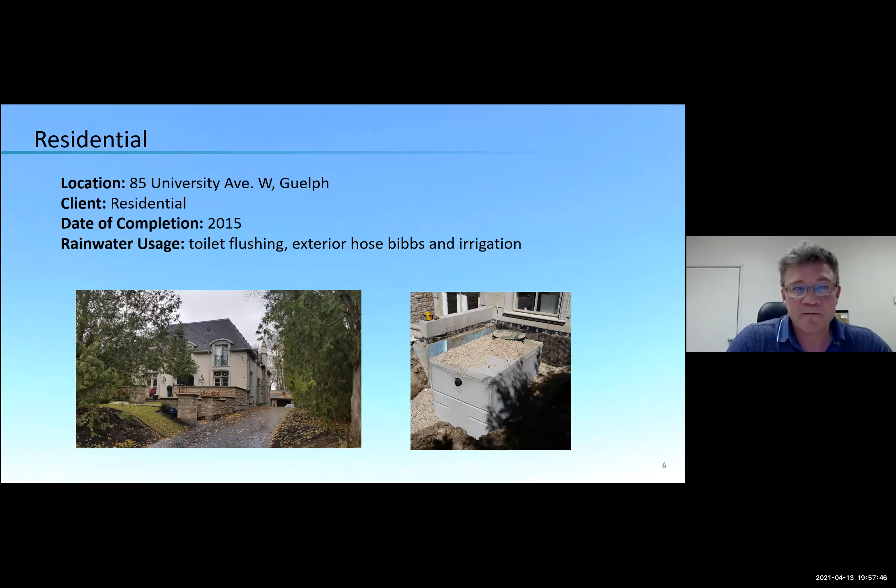And as Ben had touched on earlier to some extent, rainwater for residential application may reduce the municipal water bill by upwards of 50%. And rainwater is naturally soft, so it may mean reduced cycling of water softeners and less detergent use.

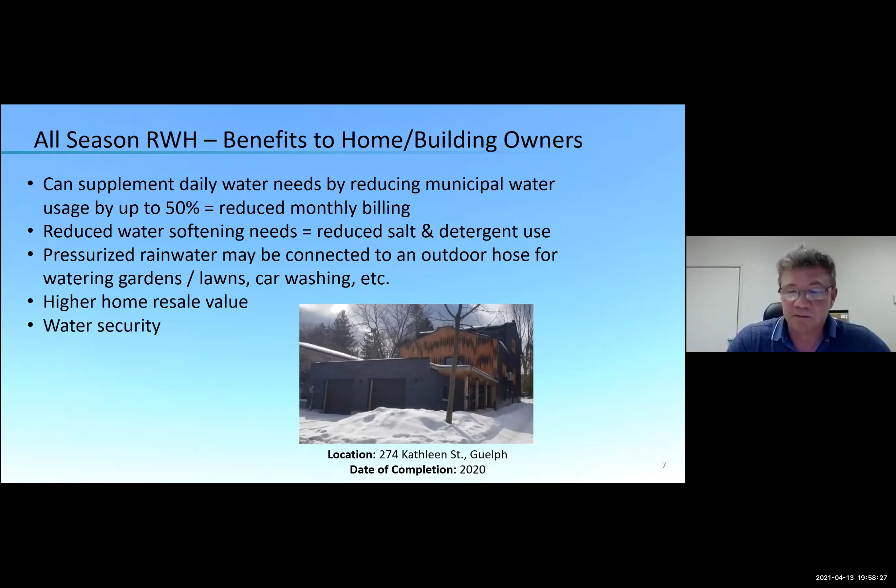Pressurized rainwater is ideal for outdoor hose use, watering and car washing. It's a little bit more convenient than using buckets. All-season rainwater harvesting may result in higher home resale value and provide water security. And that's my brief presentation.

So we're going to open this up for questions now, and I would ask that all of our panelists just unmute for the time being. I'm going to ask a generic question to all of them. I'd encourage everyone that's out there to post questions in the chat. But my generic question to you is, what do you see as the main motivation why someone goes down the path of rainwater harvesting? What do you think, Evan? Do you want to start that one off?

I think it's just wanting to get more out of what's there and what's available just from nature. So there's zero cost to it, right? It makes an investment, and as soon as it rains the next time, it's paying off, right? So I feel like that's pretty intrinsic to it, just feeling like you can get something just out of nature off your house or whatever. Right? So definitely an environmental motivation. How about you, Ben?

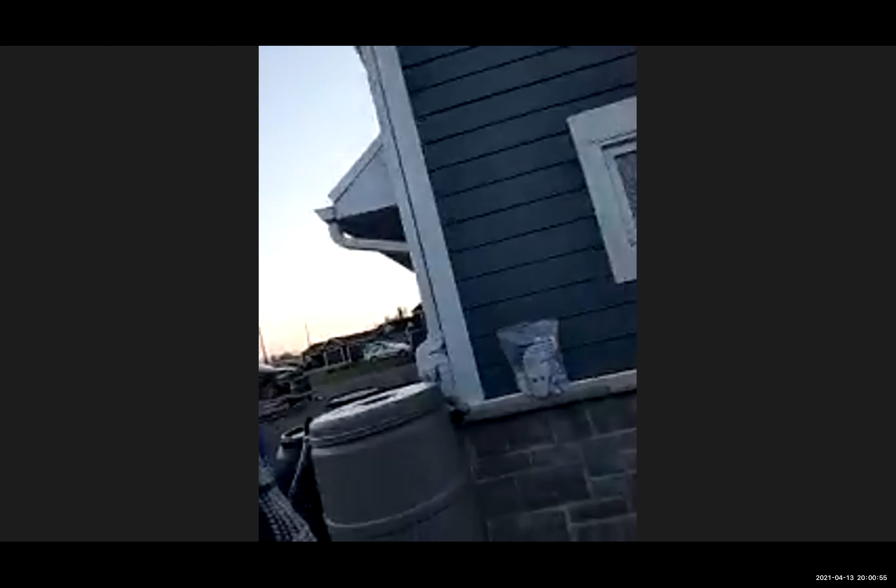Well, for us, it's a lot of gardeners. People are looking to improve the look of their homes, or they want to grow some great food. And they understand that rainwater doesn't have the chlorine or fluoride that we often find in processed tap water. So it's actually better for your lawns and gardens and trees. And Tim, how about you?

Numerous reasons. In Guelph, there's a water use consciousness for residents and people that want to incorporate sustainability into their homes, as I touched on briefly in the presentation about water security. Yeah, that's a really interesting one. And Beatrice, I'm very curious to hear your sense on that.

I totally agree. I think when you're talking about a city, especially a city in a place like Canada, where you see water all around you, it's more because of the environmental awareness that people have here, especially when you live in a big city. But if you go to other places, it's more the need that is driving that.

Yeah. Gotcha. We do have a question here. I'm not surprised this one came up right away. The question is, what's the cost to install the system, and the difference between an above ground and a below ground system? And I know the answer is, it depends. So I'm going to go backwards to our suppliers again. Go to Tim first. We're talking residential systems here, because obviously commercial scale systems would be significantly more expensive. Can you give us a sense of what people are talking about in a range?